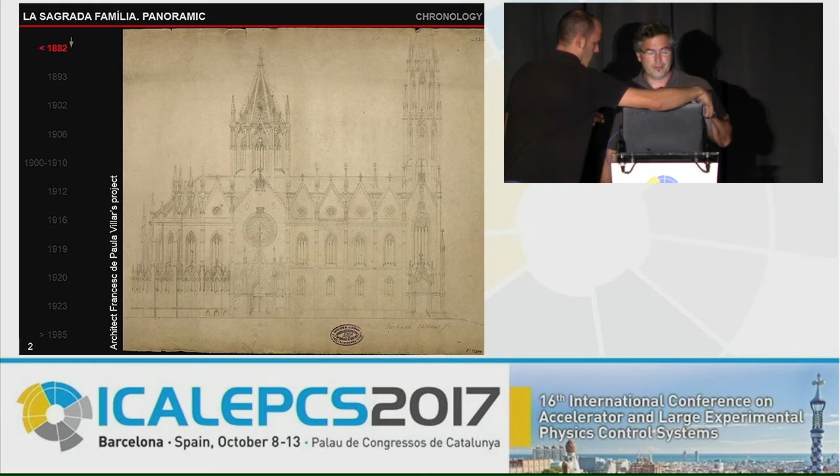Then in 1882, the first stone was put in place, and they began the project that you can see. That's a neo-Gothic cathedral. In 1883, because of some disagreements between the clients and Francesc de Paula Villar, the architect, Villar resigned from the works, and the association commissioned Gaudí to continue the works following Villar's project. He was 30 years old.

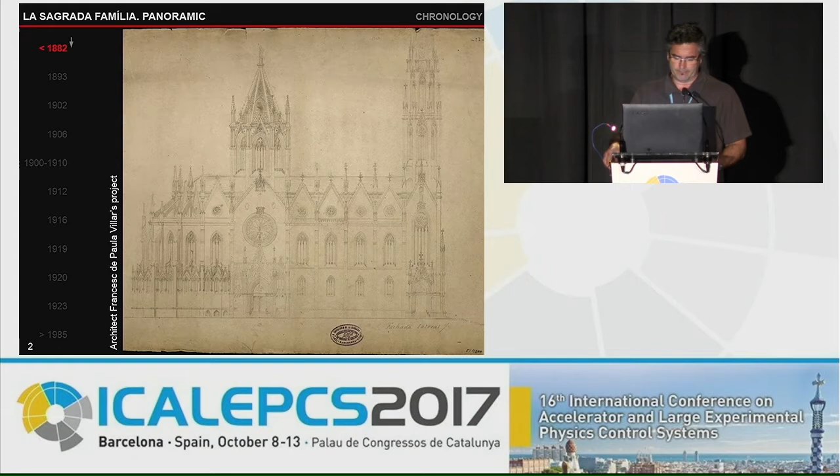But who was Antoni Gaudí? Antoni Gaudí was born in 1852 in Reus, near Barcelona, and in 1878 graduated from the high school of architecture. From this point, he participated in the Universal Exposition. He made lots of buildings near Barcelona and also outside Barcelona, and he collaborated habitually with Francesc de Paula Villar from 1877. Then, with these works over 20 years, Crypta Güell, Parc Güell. Güell was a Catalan industrialist, politician, and patron, and he had a special interest in modernist architecture.

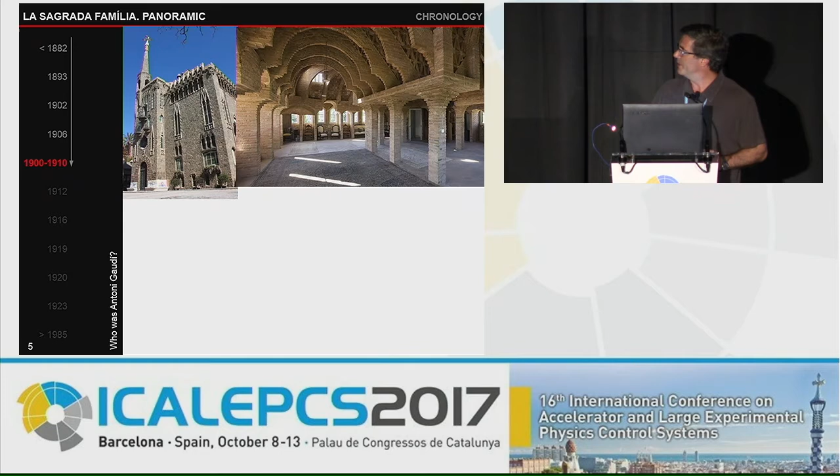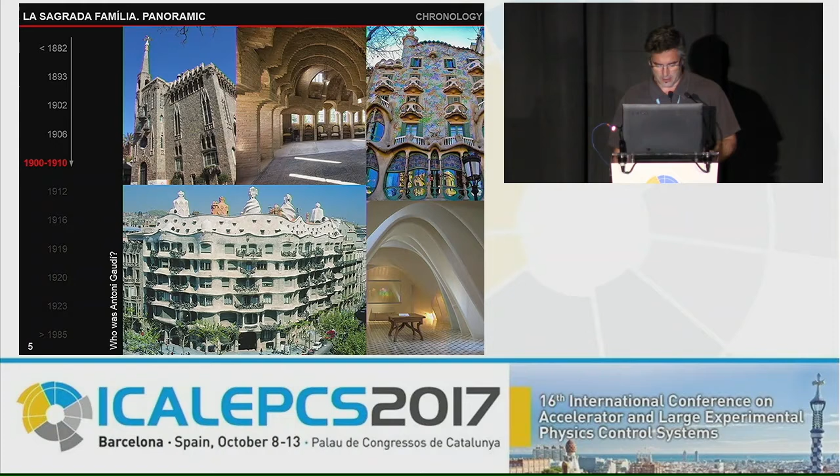Gaudí was a very rare architect, and he made a lot of buildings that were extraordinary and very special. These are the images we have in our heads when we talk about Gaudí's works. Normally, we see buildings with complex geometry, but also with some kind of, I can say, chaotic or aleatory forms. These are parabolic arcs, or this facade in Milà House. That's La Pedrera. La Pedrera is the Catalan name for the quarry. The image for the people was that it was a quarry. Gaudí, in his time, was not an architect without polemics.

He followed the works until 1902. In 1902, he dared to present a different proposal for the Sagrada Família, different from the project of Villar that he had been following for 20 years. And he presented that sketch. And the clients accepted. He was then 50 years old, and he already had enough prestige, national and international. Then the clients accepted the change from neo-Gothic to modernism.

Following a bit the life of Gaudí, then we return to Sagrada Família. In 1914, when he finished all the works he had in Parc Güell and Colònia Güell, he devoted himself entirely to the project of Sagrada Família. To the point that in 1925, he began residing inside the workshop of Sagrada Família. But not for a long time, because in June of 1926, 3 days after being hit by a tramway, he died in Barcelona.

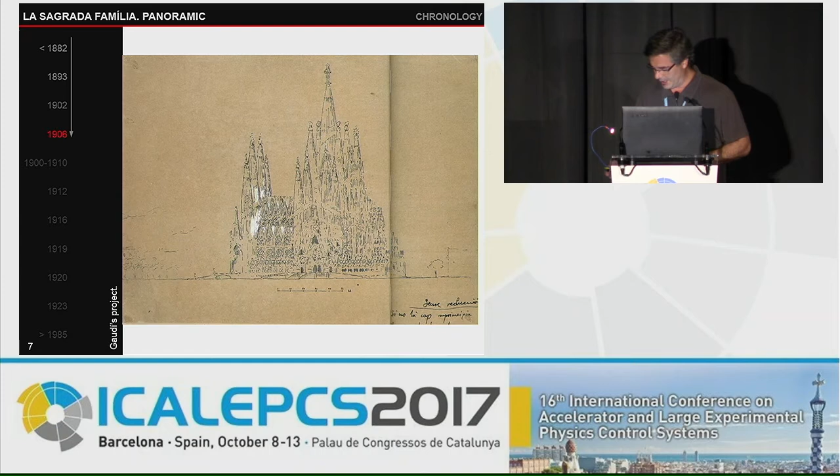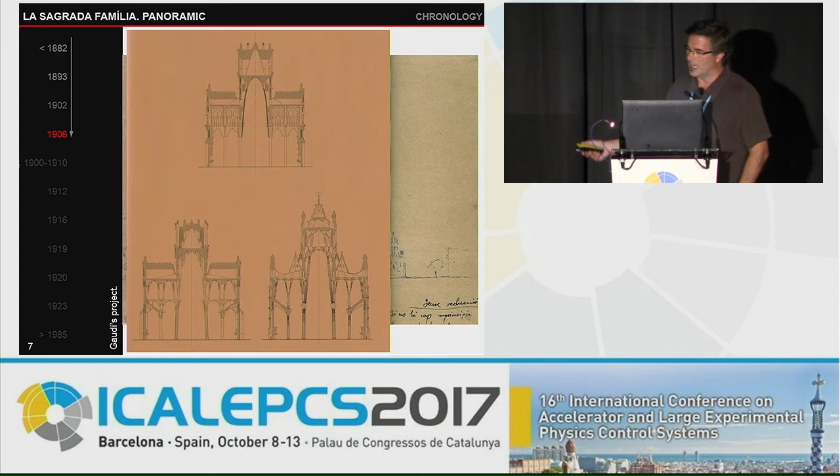This was the external view, but inside he decided to make a forest with the light entering between the leaves of the trees. He tried to make a forest. These are reproductions of the sketches of Gaudí from the first proposals, with a bit classical section of a 5 naves church, changing to more complex solutions for the pillars and not symmetric solutions for the arcs in the square and the roof, and the definitive section that solves the pillars of the main nave and the secondary nave like trees.

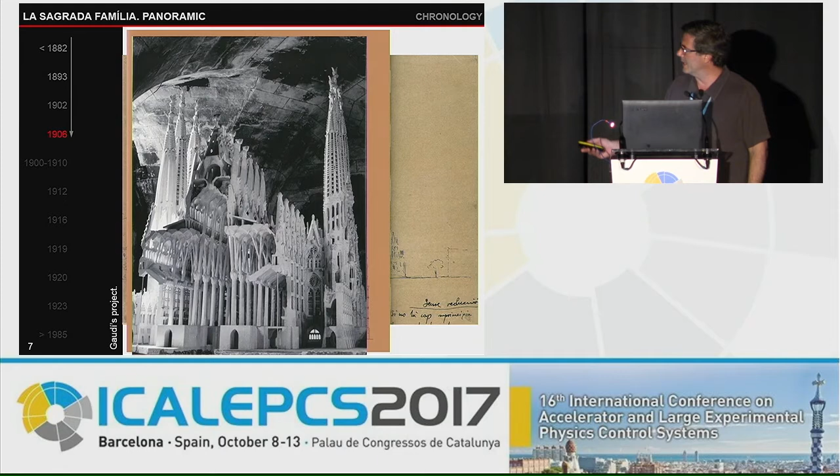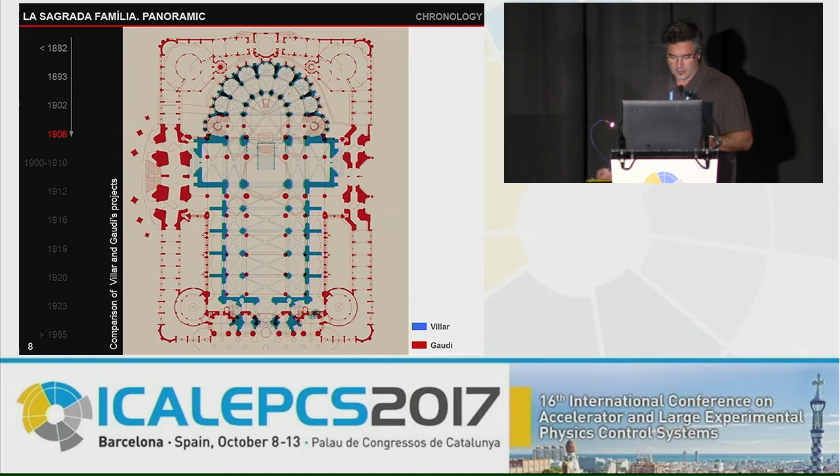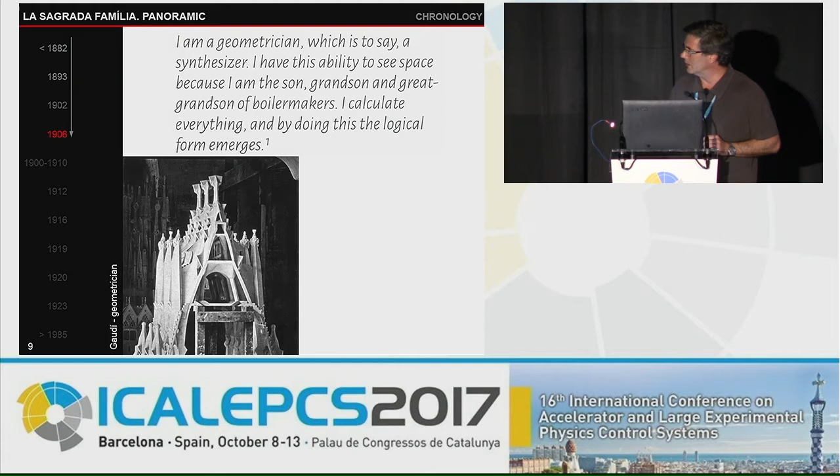This is a sentence from Gaudí. He defines himself as a geometrician. He considered that the form emerged from a structure and the structure emerged from the loads. That's, for us, very simple to understand, but when Neo-Gothic or Modernism were composing facades and buildings and then demanding the support of the loads, the vision of Gaudí was absolutely organic, absolutely geometric. He believed the loads must trace the form of the building. These are the upper roofs on the main nave and the sacristy with his forms.

And he was an intuitive scientist. He modified the forms with the weight. When he used these small weights to simulate the real weight of the building, he could change the directions and the form of the arcs and the plates, moving or increasing or reducing the weight he put in every one of these points. Then he searched to solve mechanically or statically the geometry he was looking for.

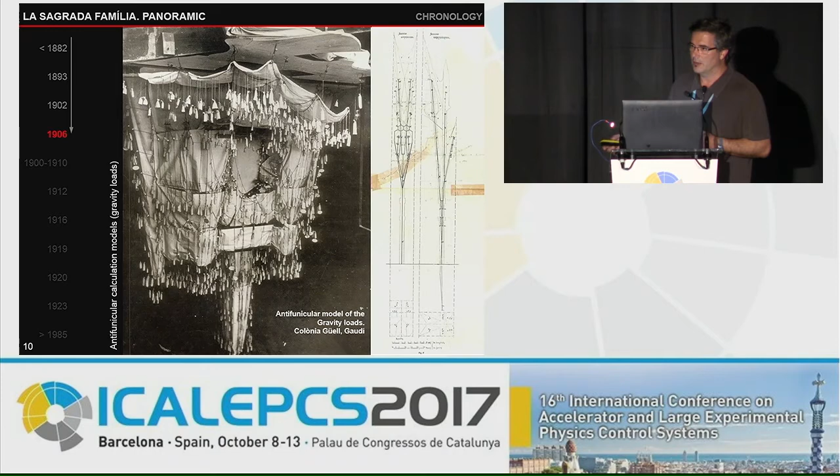This is his sentence: I calculate everything first by assuming certain weights to find the funicular. The funicular is the geometry and the direction he obtains from the cable structure. Sorry, these are cables that are covered with ropes, but the cables were the direction of the arcs, the geometry of the arcs. And he said, I can vary the funiculars, and in this manner the logical form emerged from the needs.

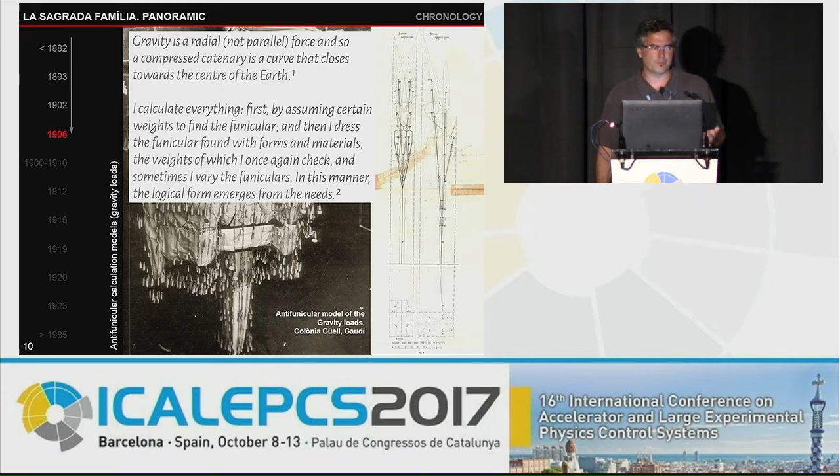Gaudí also was a planner. And he had very clear the vision that his building must be seen from the four corners, to always face two facades of the building. Then he made this project in 1916, approved by the city. At this moment, it was not a city, the Sant Martí dels Provençals, and this was the initial planning around the Sagrada Família.

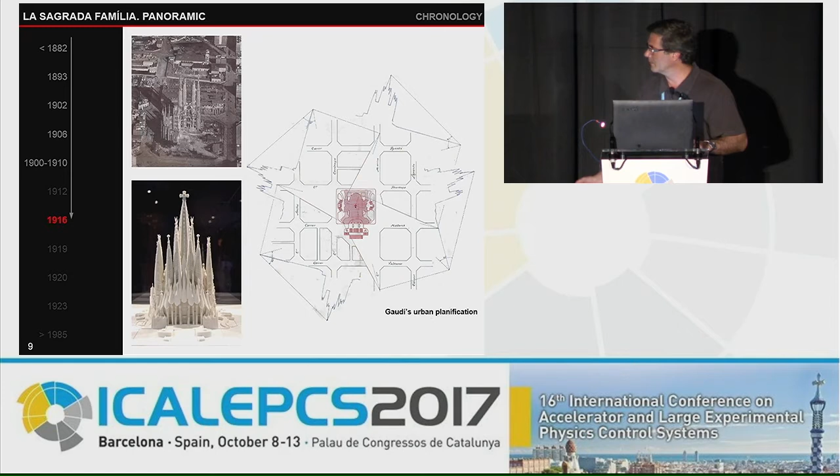This was more or less the state of the works in 1920. It was a bit before that that Gaudí changed absolutely his habitual form of work. And this is the point where I want to make a little parenthesis to explain that this building is not free of controversy. Many people say it's anachronistic to build a cathedral in the 21st century, or this is not the building that Gaudí could construct, because only Gaudí could construct the Sagrada Família.

But more than 4 million people every year visit Sagrada Família, and it's not because of our team. It's because of the genius of Antoni Gaudí. Because the actual team, we are more than 100 people involved in the project and the construction. We are following the project of Gaudí.

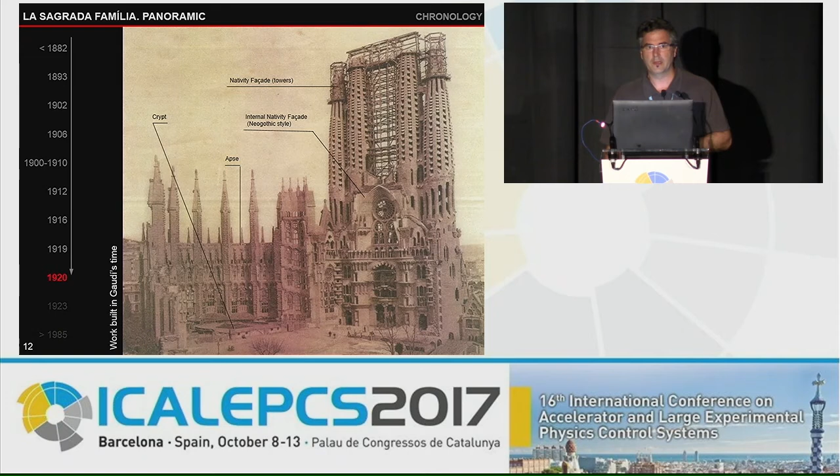And the question is, how is it possible to follow the project of Gaudí? Well, it's possible, and that's a liaison with the point where I stopped before, because Gaudí changed the normal way to project, and he began to work intensively to leave as many plaster models, writings and drawings as possible, but overall he searched the way to leave the laws to follow for the temple.

These are drawings. This is the workshop for plaster models. You can see pieces, serial pieces that repeat and can make the general and genial forms. This is another plaster model of the Glory facade. And this is the model, the actual one, made following all the laws we find in the writings, drawings, and plasters.

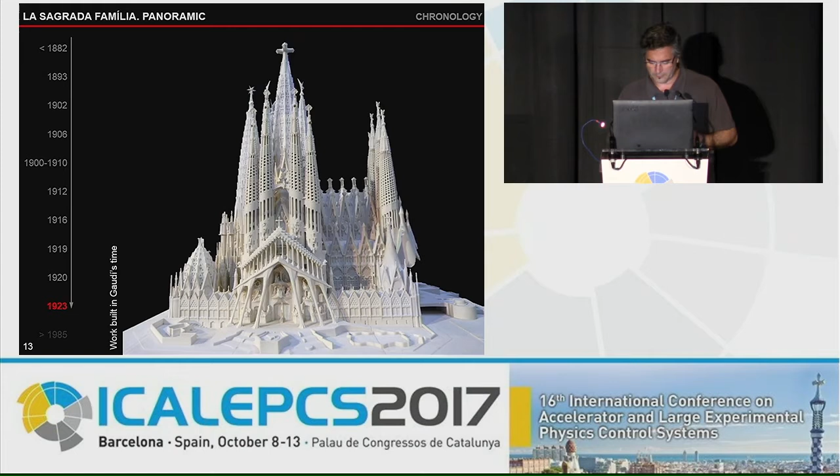As he said to his chronicler, César Martinell, great temples were not the work of just an architect. I know that the personal taste and techniques of the architects succeeding me will have an influence on the work, but I don't mind. I think it will be to the benefit of the temple. A work like this should be the offspring of a long era. The longer, the better.

From 1914, he only worked on Sagrada Família. And he based his design on these plaster models and on geometrical laws based on ruled surfaces geometry. From these models he extracted the drawings in 2 dimensions, mainly from photographs. The main geometric ruled surfaces he used were the hyperbolic paraboloids, revolution paraboloids, and revolution hyperboloids for all the surfaces, and he used catenary arcs to define the axis of pillars.

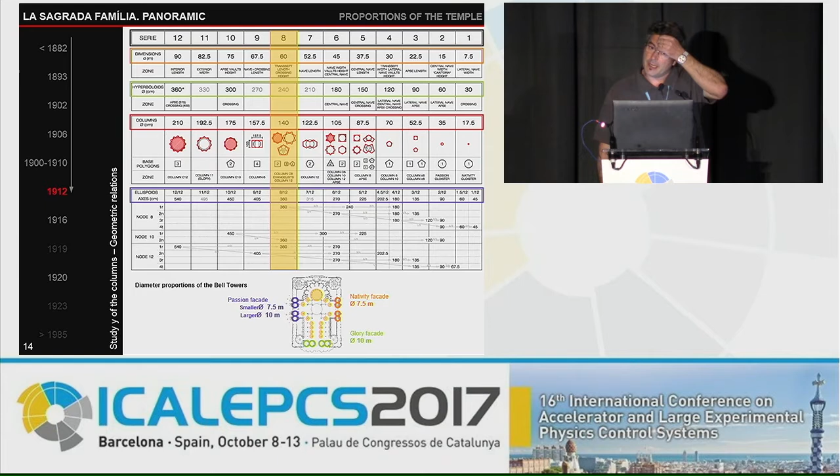Then he was a geometrician, intuitive, and a mathematician, because he conceived a relation between all the geometric elements. In this case, we have the table of the pillars, all the pillars of the Basílica. The beginning of all is this measure and this other measure. The module of the main nave is 7.5 by 7.5 meters, the distance between the pillars of the lateral nave. And he used multiples or parts not in base 10, but in base 12, like the apostles.

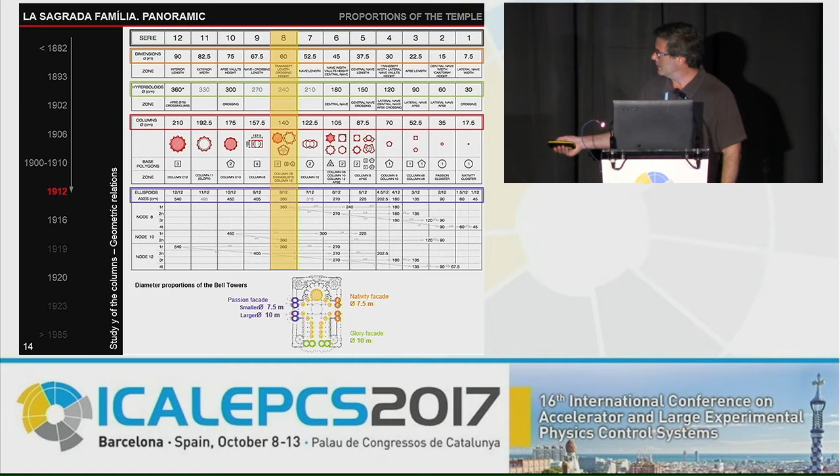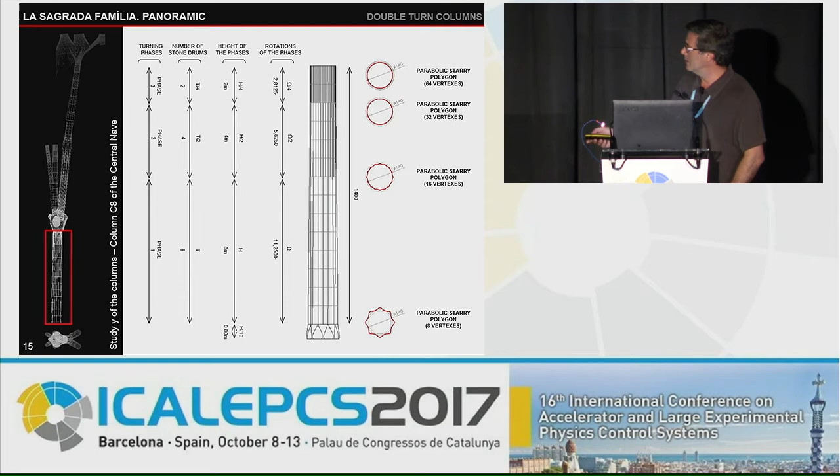Gaudí was very, very religious, and the Sagrada Família is an authentic lesson of religious symbology. Then applying this, for example, in the column of 8, the C8 column, these columns in the main nave, these others in the side naves and also in the apse. Looking here, this is one of these pillars. He began with the base with elephant feet and constructed the pillar in 3 phases. Each phase had 2 turning squares as a base. These squares were rounded with parabolas, and each drum of stone has the perimeter, all the skin, with a succession of little turns that are expressed in the parametric table.

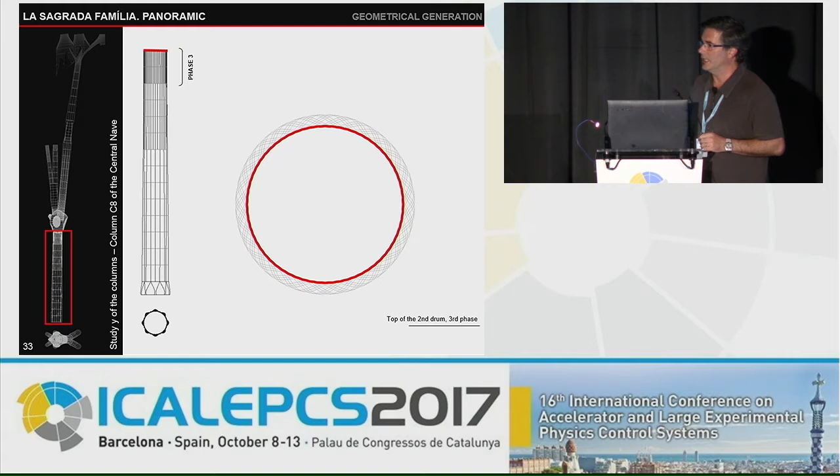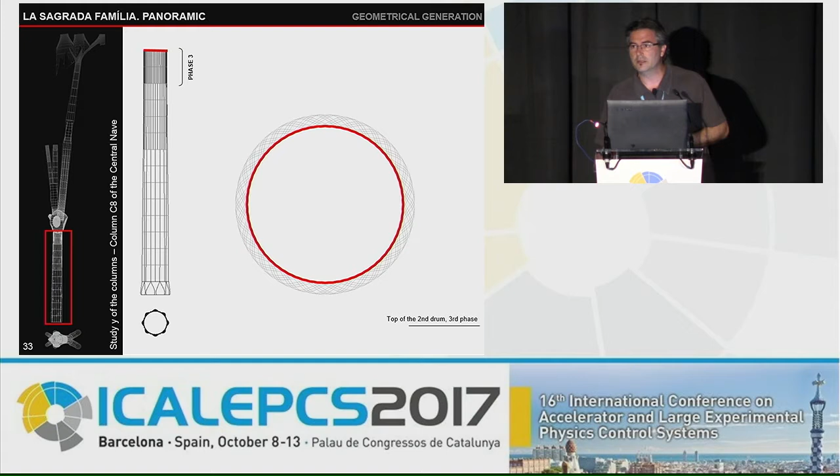With little turns, the intersection of the surfaces gives us the result, climbing drum by drum. This is the first phase, 8 meters high, the second phase, 4 meters high, with drums from 1 to 4, finished with 32 edges, and the last phase, with 2 drums and 64 edges. If you look at this form with magnification, you can see that it's not a perfect circle; the transition in each pillar is from 2 squares turned 45 degrees to the circle in the knot, where we have the end of the trunk and the beginning of the branches.

Like in nature, the trees are like this. In geometry, the trees are like this. The knot, at the point of arrival of the trunk and initiation of the branches, is 2 pentagons with 2 squares that develop the geometry through an ellipsoid. And these are the 3 knots of the pillars of the main nave with these ellipsoids in the envelope. These are the ellipsoids, and this is the intersection of one ellipsoid of revolution with the cylinders of the trunk and the branches.

You can see also a difference between these 3 pillars is the color. It's not only a question of color, it's a question of material. For Gaudí, when he worked with antifunicular calculation, he conceived that the same section would be able to support more load if the material had more mechanical capacities.

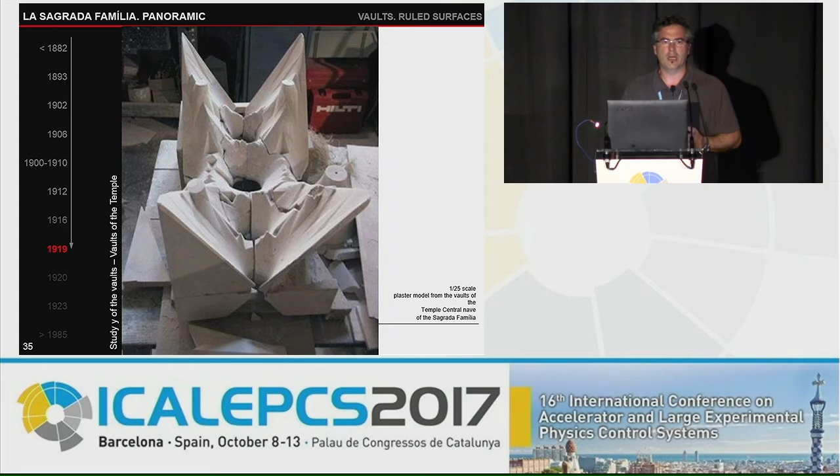And we find the 1:25 scale plaster model, and he worked in the vaults with hyperboloids, and the intersections between pillars and holes to let the light enter were parametric also, in relation to the multiples of the distance between the pillars that contain one hyperbolic model that had holes in these positions and in this other position.

After the vaults, we find the other difficult geometrical problem. This is the towers. We have 12 towers in Nativity, Passion, and, excuse me, maybe here I can, yes. This is Nativity facade, this is Passion facade, this is Glory facade.

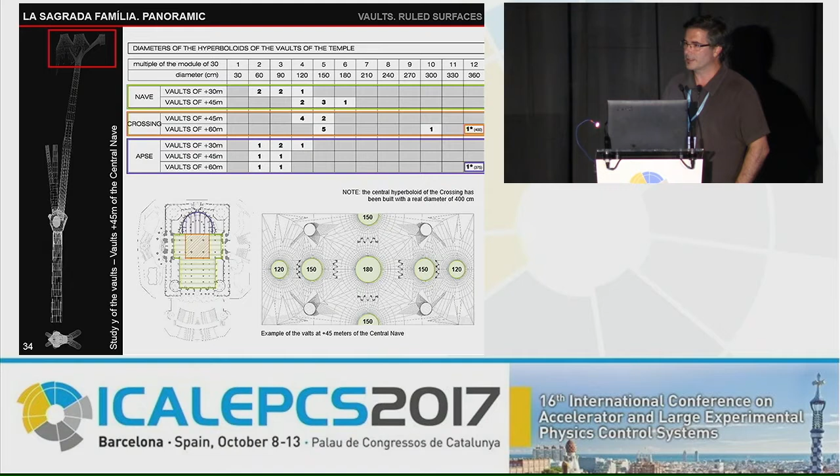Each of these three facades has 4 towers, but it is in the center, in the crossing of the Basilica, that we have the biggest tower, the Jesus Christ tower, and 4 towers around him that are the 4 evangelists. And after Jesus, just over the apse, we have the Mary tower, the Mother of God.

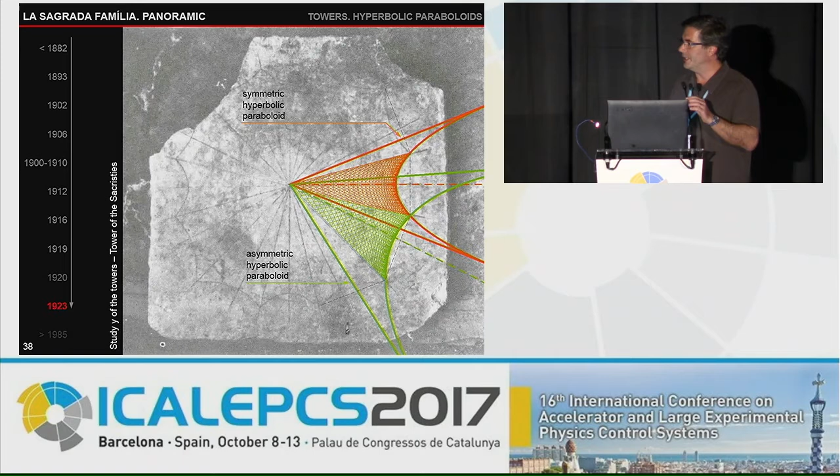Then how is it possible to trace and to obtain a law to construct these towers? His proposal was on a big stone with the form of the sacristy. And he described with the traces the hyperbolic paraboloids, asymmetric one of them and symmetric the other one. This is the result of converting these hyperbolic surfaces. The red ones are symmetric, the green ones are asymmetric.

Then we can obtain the surface and the nerves and the arcs of the sacristy. And the same for the towers. It is exactly the same geometry, but higher. Then this is the sacristy, the plaster model of the sacristy, and this is the conversion in computer.

And that was the big legacy of Gaudí, that when we arrived in 1986, 60 years after the death of Gaudí, we found all that. We could formulate all the proportions and dimensions we had to respect, and we began to work with these laws to prepare the models of the new building that were lost or were burned in the Civil War.

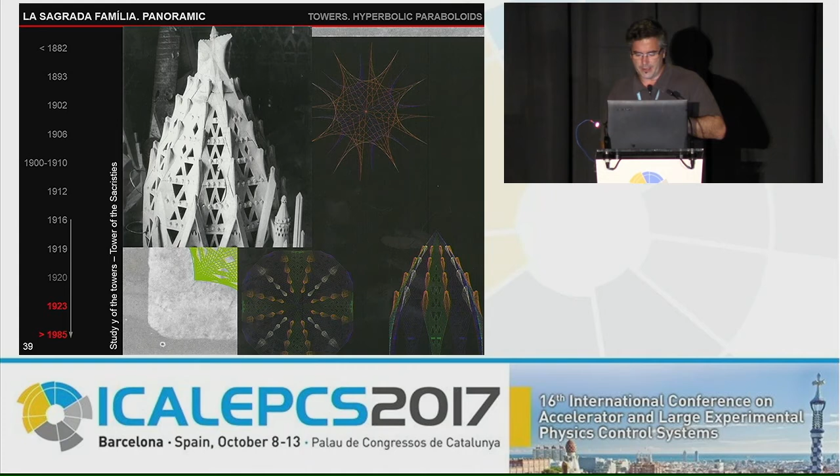Sorry. This new era was a new way of construction, because we began the new step in Sagrada Família. Till the 80s and 90s, we constructed with more or less conventional systems, but from the 90s, we began to project with another system. This is the pre-industrialized construction.

This means we are sure that the building now is more or less at 85, near 90 meters over the street, but it has to arrive at 170. The question is how to make all this big building over another big building and maintain the building under visits.

Many of you, I know, this afternoon will go there. Then you know that 80 meters over your head, there are hundreds and thousands of tons of structure that are at this moment being mounted and constructed. Then this was an obsession from the first day, but now it has a lot of sense, more sense, to work with the maximum security.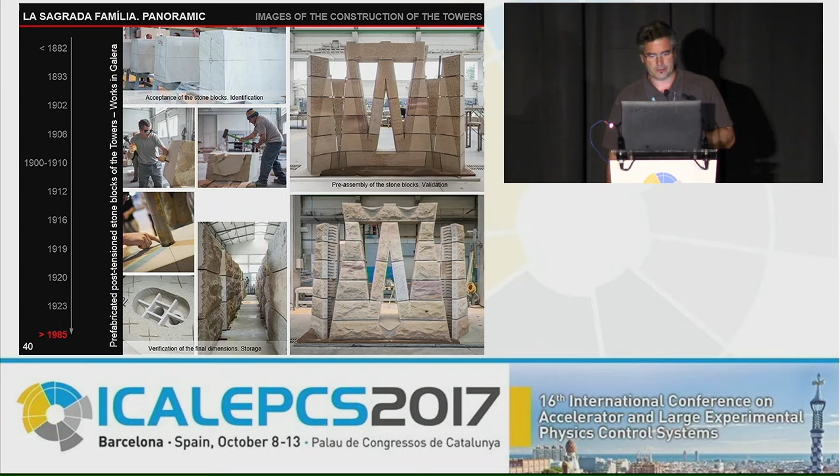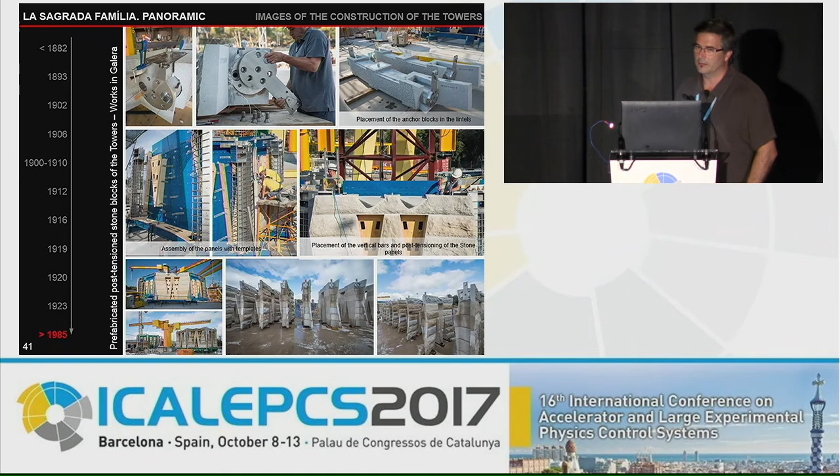The blocks are taken to the preparation workshop, which is near Barcelona, near Manresa, at Galera, and the blocks are sculpted, polished, machined there, pre-assembled, and stored, and mechanized, post-tensioned, and assembled in panels. Then here you can see the works of prestressing, here the mounting of the panels, and finally the panels we have to mount on site.

When that arrives at the work at Sagrada Família, we have to elevate it, place, and mount it with this kind of precision. This is one panel that may have a load of between 10 and 20 tons, hanging from 100 meters, with the precision to take it from the street and put it in place with not very much tolerance. We have tolerance, of course.

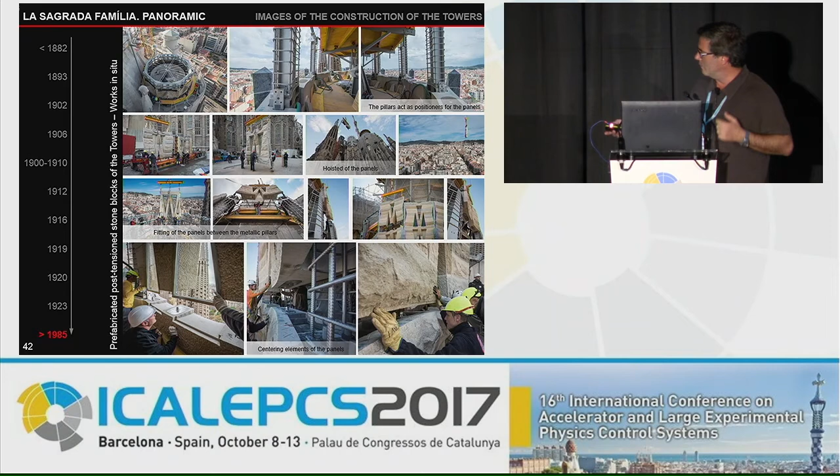Then, once we have the panels on site, we put the pieces to fix it. All the structure is in stainless steel. All the reinforcements are also in stainless steel, and the guides to enter the panels are the structure itself, the metallic structure we have inside. It is a rib that follows the geometry of the paraboloids, and these are the guides to enter the panels with the same geometry.

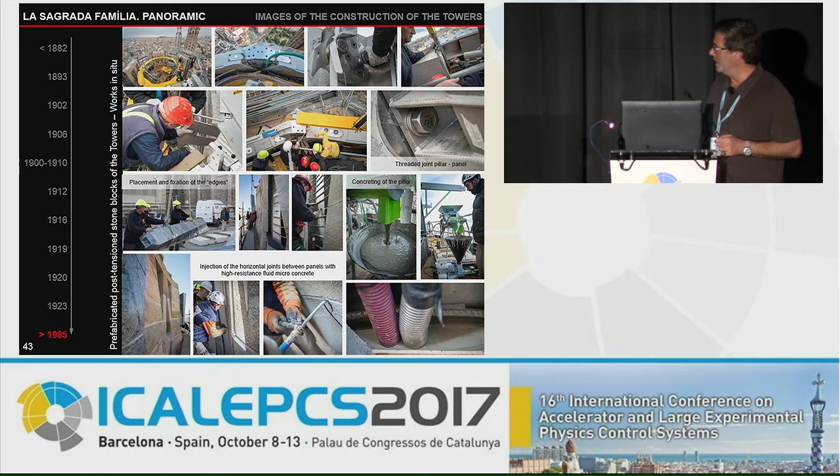When we have fixed it mechanically and with all the edges covered, we concrete the space that we have between the metallic structure, the steel structure, and the stone substructure. Finally, we make the sealant between the pieces, the different panels.

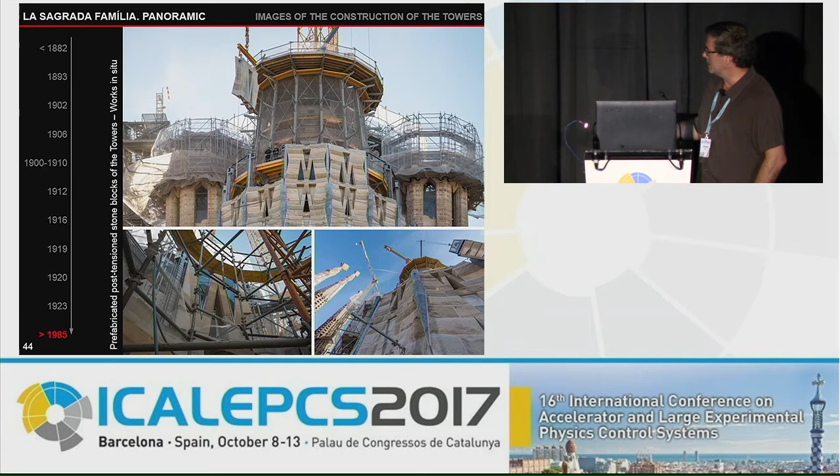Here is an upside view. And this is the rhythm that we can express for this part of the works. It is the most important, the most risky solution, because, as I said, we have not a lot of tolerance.

Then you don't have a line here, this is a curve. This is a hyperboloid that doesn't climb through here, but climbs to here. Then this is one direction where you have to put inside these little panels and make all the pieces work together.

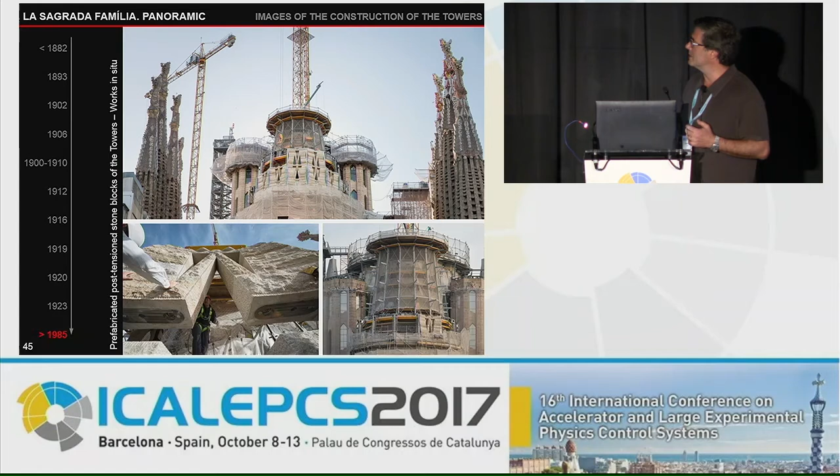This is one of the mechanical solutions we have to make the union between one step and the other. You can see here the steel structure with the lower panel. You can enter the other panel when you have the other level. All that is the result of projects during 8 or 10 years, with many people in the world involved.

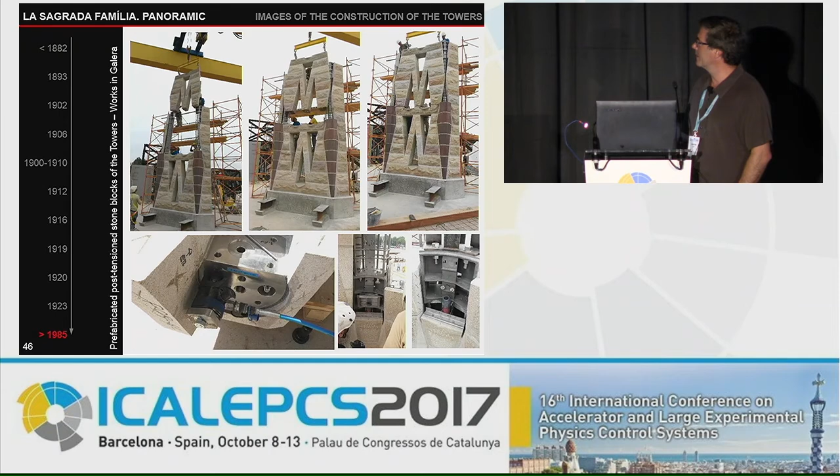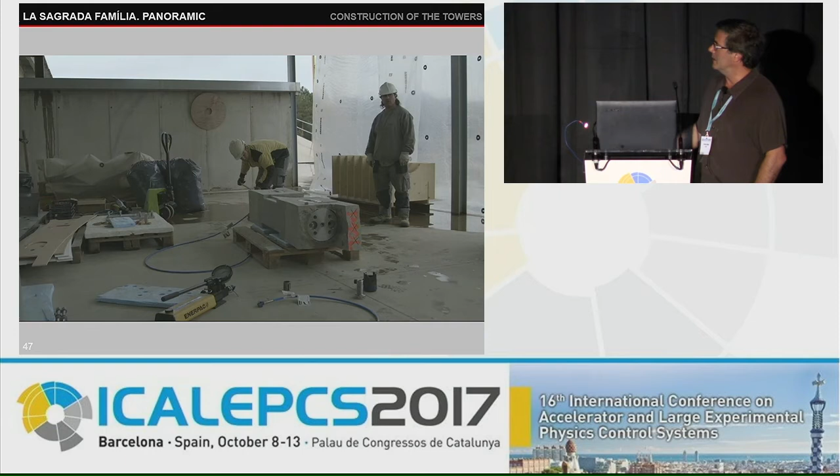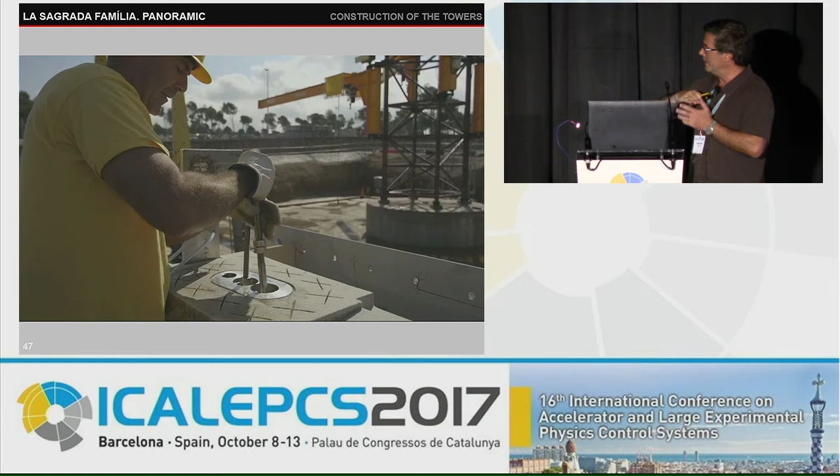This is a summary of what I explained. This is the work on the blocks. This is the presentation of the panels, the pretension, the prestressing of the beams, and the assembly between lintels and pillars, because they are all prestressed, and the assembly of these prestressed bars to form a prestressed panel.

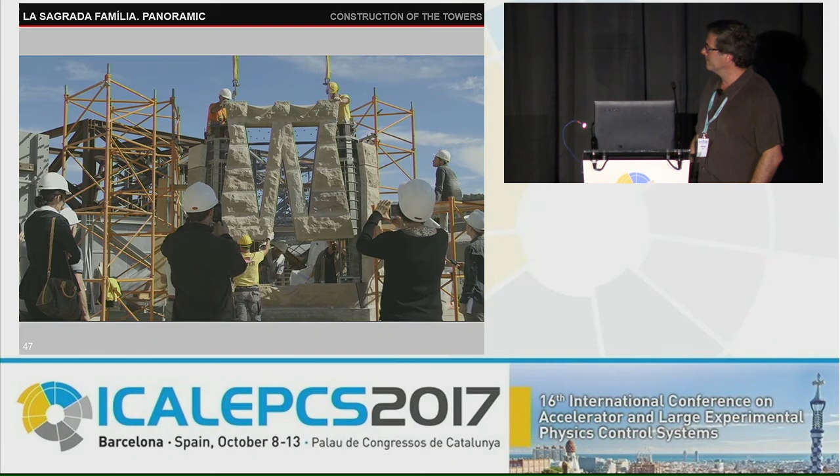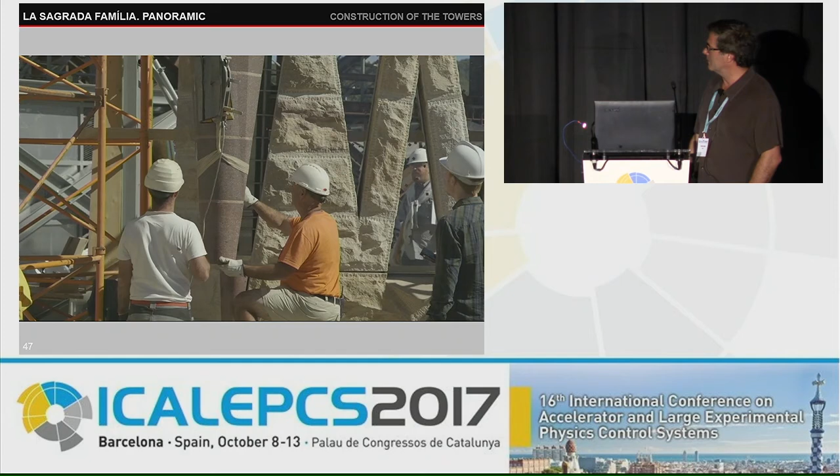These are the works, the precision works, and when you have that, you put, this is one of the stainless steel pillars that's fixed with the under pillar, and here you have the entrance of the panel that slowly enters through the point of connection. This is another stone that's placed in the corner to finish the envelope of the pillar.

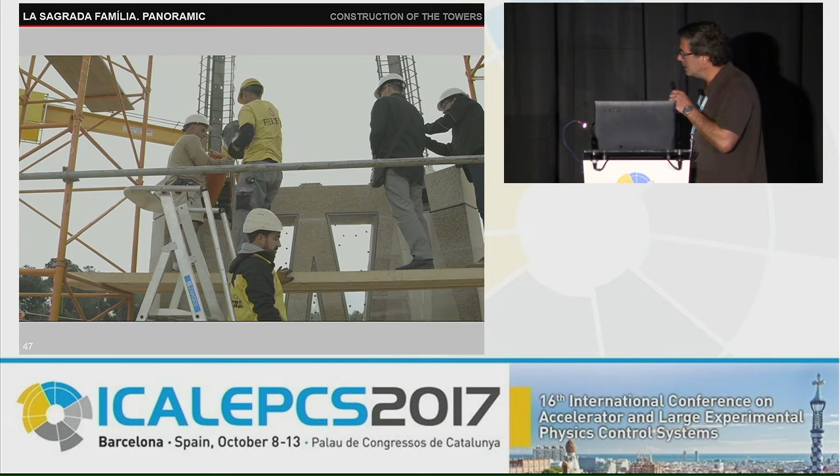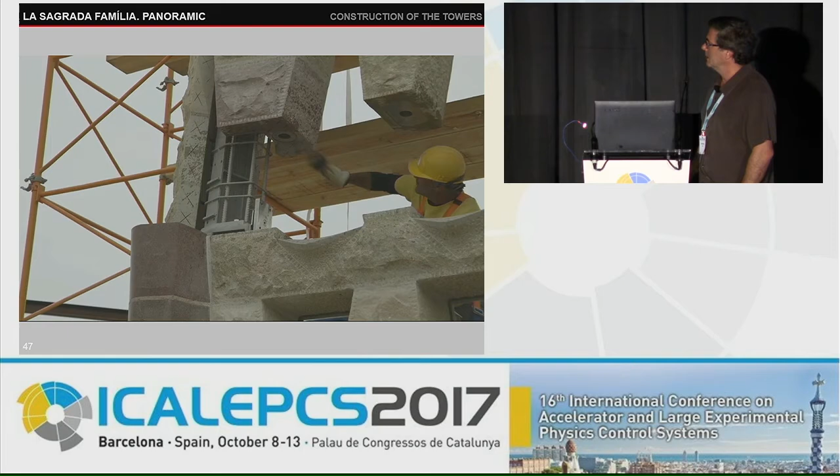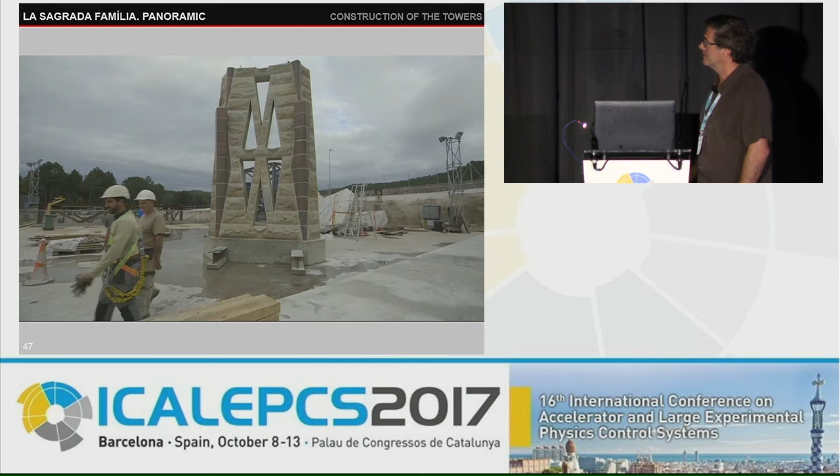This is the union between panels, and this is the preparation at Galera. No, it's not in Sagrada Família, but it's exactly the system that we are using now in Sagrada Família. And this is the arrival of the last panel that we have in this model. You can see this is the point that has to exactly join one model to the other, and that's one of the 200 models that we have to make only in the Evangelist Towers.

Let's change the question a bit. Weights and materials. We have here an example of the... see, Viollet-le-Duc made, I can see the date. Wait.

No. In the 19th century, I don't see the year. He made the pinnacle over the crossing in Notre Dame de Paris. The whole pinnacle had a weight of 750 tons.

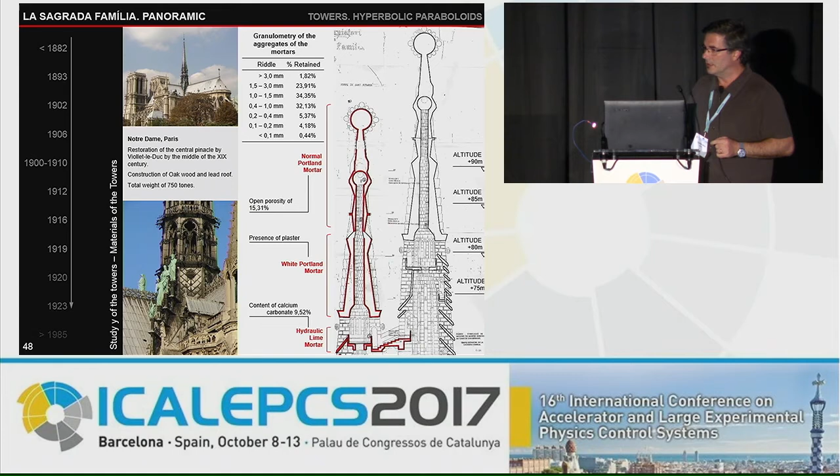And the towers of Sagrada Família and the loads on the building are a little bit bigger. The main pillars, these are the Jesus Christ pillars. Every column has to support 6,150 tons. This means that if we add the 4 towers, we have 24,000 tons. This is a high and heavy building.

The other columns are not so aggressive, but they also have a very important weight. And why do we have these loads? Why do we have these weights? Because it's a very high building. 170 meters is a very high building, and Gaudí didn't calculate, because he couldn't, the effects of the horizontal loads. Wind or seismic actions were not possible to consider with the antifunicular models.

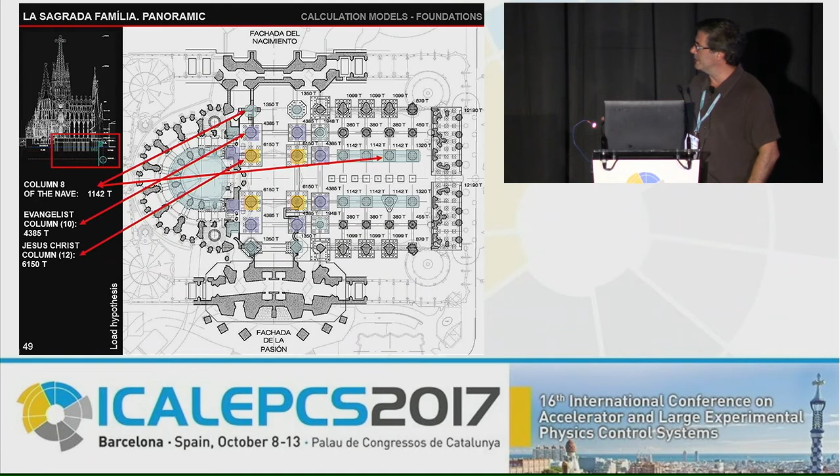In this case, excuse me, this is a small drawing, but you can see that the foundations of all these pillars are piles 20 meters deep that don't cross the phreatic level and can support the actions we considered in '86. Then this was a local reinforcement with micropiles and arms.

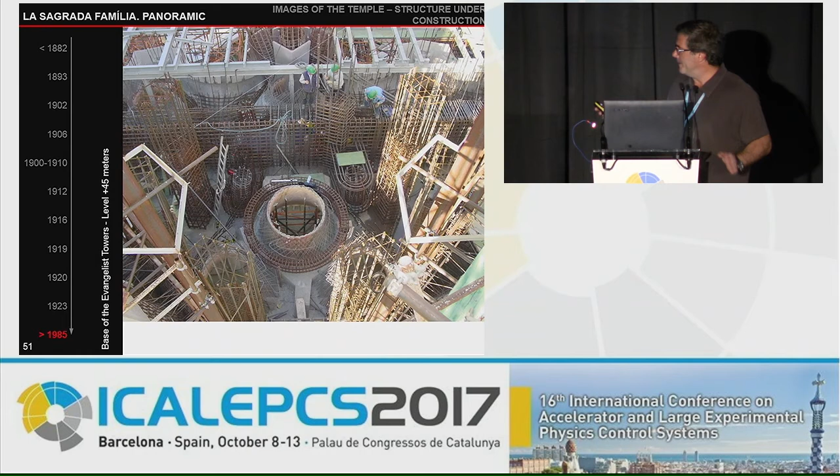And from here upward, we knew that the structure has to be between the skin, because the skin was the project of Gaudí. We had to respect absolutely the geometry of Gaudí's project, and we had a stone skin around the pillars, the vaults, the arcs that we had to conserve. As you've seen in the animations and last image, the structure really has very little space. This is all the iron we have to put between the stone skins.

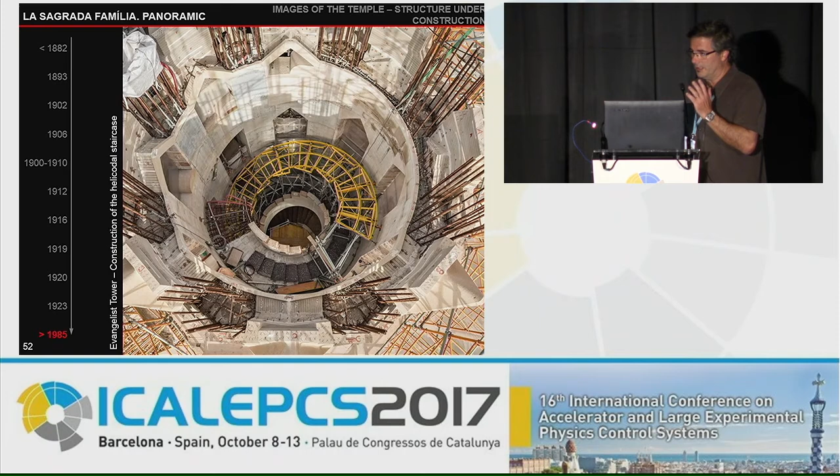You can see here a skin of stone, a wall, inside one of the staircases of one Evangelist tower. And these are the arrestants you can see outside. Then we can put concrete here. You have to think that the Evangelist towers will be 135 meters, and now we are between 80 and 90 meters from the street.

These are the works we have. This is from 3 years ago; it's covered now, but we can follow. This is to explain what kind of works we did during all these years. This is Mary's Tower. This is over the apse. This is the base of Jesus Tower. And these are the Evangelist towers that at this level are absolutely connected with the Jesus Tower, but at 100 meters they are absolutely separate.

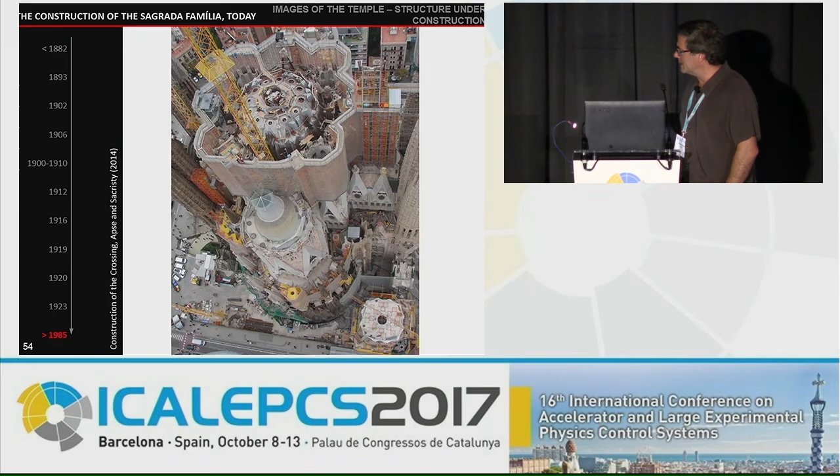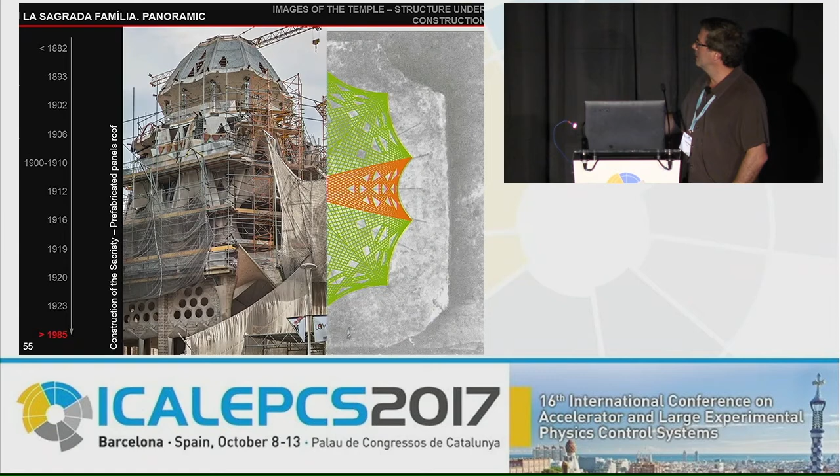And this is one of the 4 sacristies that the Sagrada Família will have. This one is finished, it's occupied, and a part is possible to visit. At this moment, you have only structure. When we worked in the sacristy or in the towers, we constructed the structure with provisional pillars, to add the facade after the construction of the structure and make the facade also have a structural role.

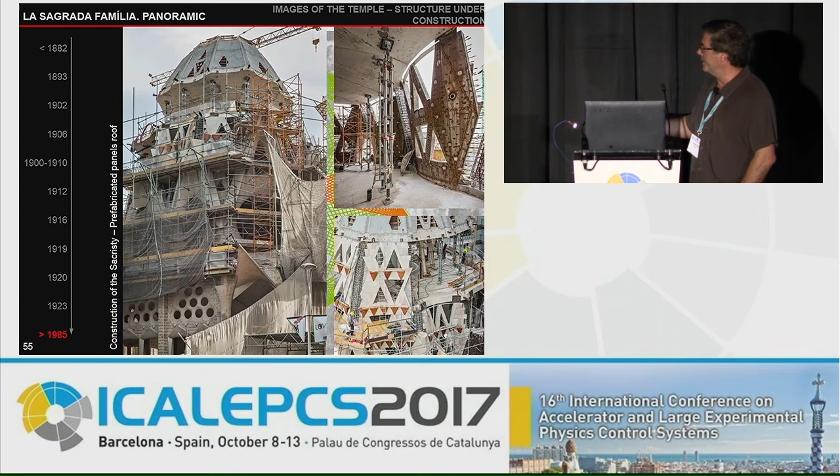This is one model. You can see it here. Here we have, like in the project, the arrestones. This will be another arrestone, and that comes from this geometry. And the sacristy will be finished as in the project.

Okay, this was a chronology of our works, but our studio is especially dedicated to structural solutions. When we began in '86, we had a problem: we did not have computer structural design programs strong enough to process such a big building.

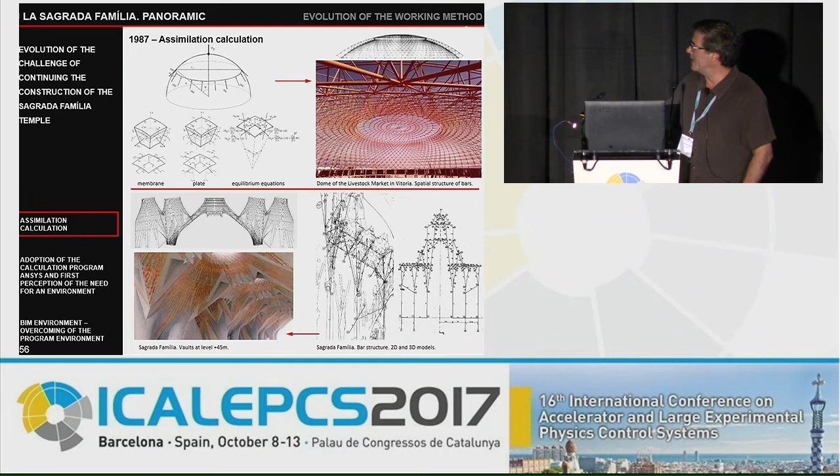In 1995, we adopt the finite elements method that had not the limitation to work only with bars. We could work with finite elements, and the finite elements had the possibility to work with plates or with volumes. And they could simulate the birth and the death of some of these elements. That was very important for us because the old building constructed in the Gaudí era was with stone. The stone is not able mechanically to support tractions. Then the simulation of the breaking of the stones was basic for us.

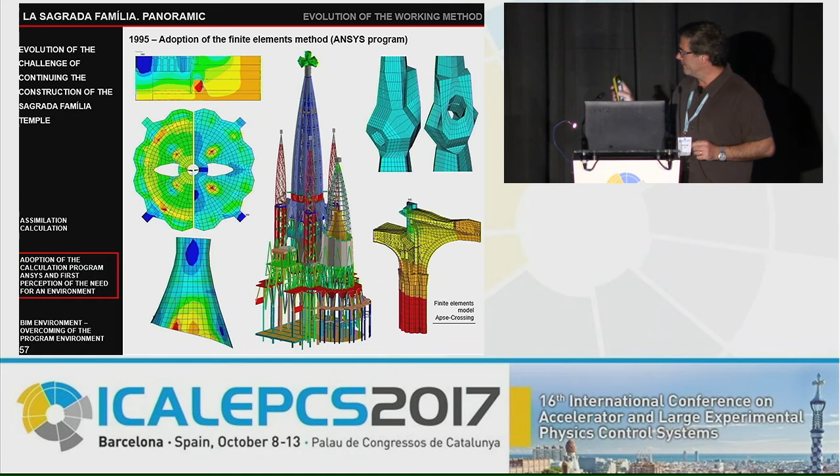This was the main problem we had, because the analysis with the elements could be an elastic analysis, that means the deformations are proportional to the actions, or plastic mechanical properties that could let residual deformations. Okay, then we worked with finite elements, and now we made another step.

The last step we made is something that was very, very basic for the future of the building. That was when we work more than 100 professionals in the same project. We need a platform of networking that could incorporate structural, geometrical, facilities, etc. We adopt the BIM, Building Information Modeling, in which the letter I is the most important because it's information. It's there where we place what category or what capacity we need of steel or the stones or the concrete.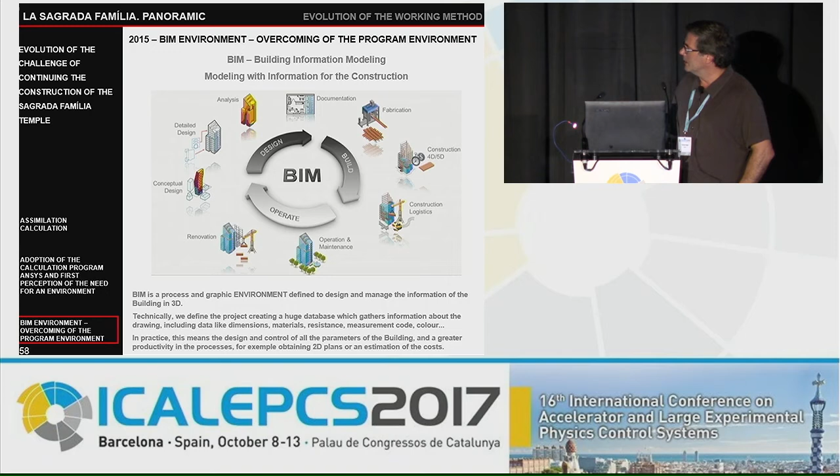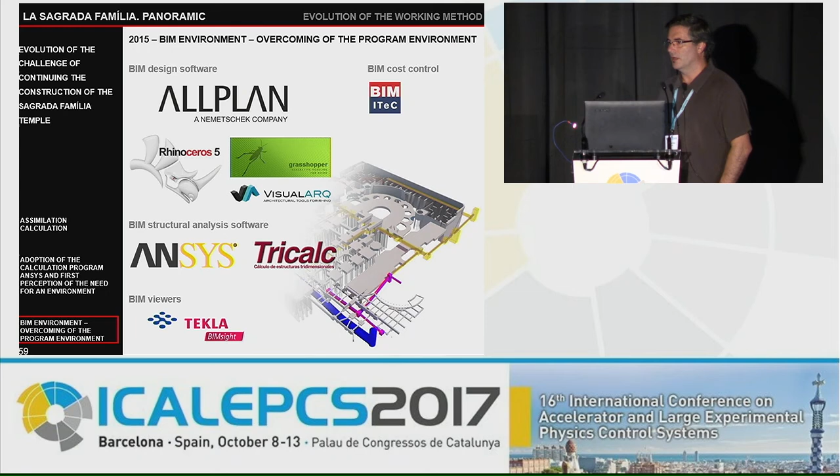This means that our environment in BIM that we work now in Sagrada Família is based on BIM design software. This is Allplan, Rhinoceros with the support of Grasshopper, BIM structural analysis with ANSYS and Tricalc, and BIM viewers in Tekla. We have also a BIM cost control to quantify each decision, which is the cost that it means.

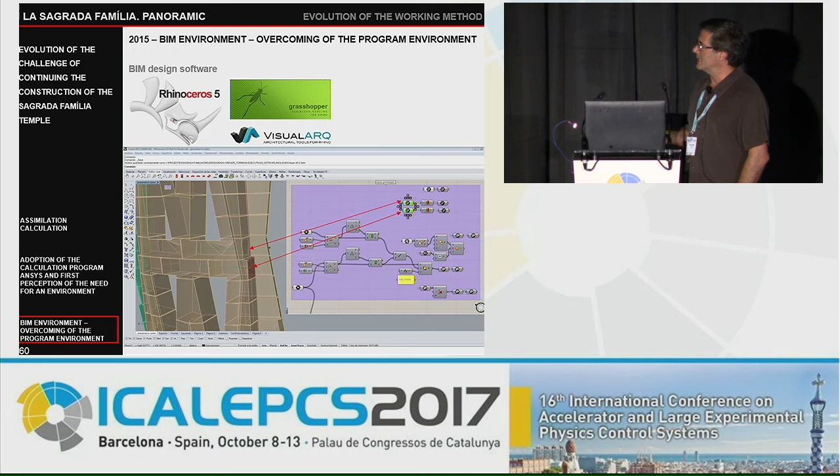In the first phase, when we receive the design from the technical office of Sagrada Família that defines the geometry and the materials, we need to obtain some information. This information could be a plate, could be an axis, could be a point, or could be a liaison. All that is only input information. We take it from the model and we process it with a platform of visual programming that converts this information as an input geometry.

This was this small square here. This other is the environment of Grasshopper for programming. Here we have this input information. This is the database with the main information we need in relation to materials available and minimum distance, the tolerance we need. And these are the outputs.

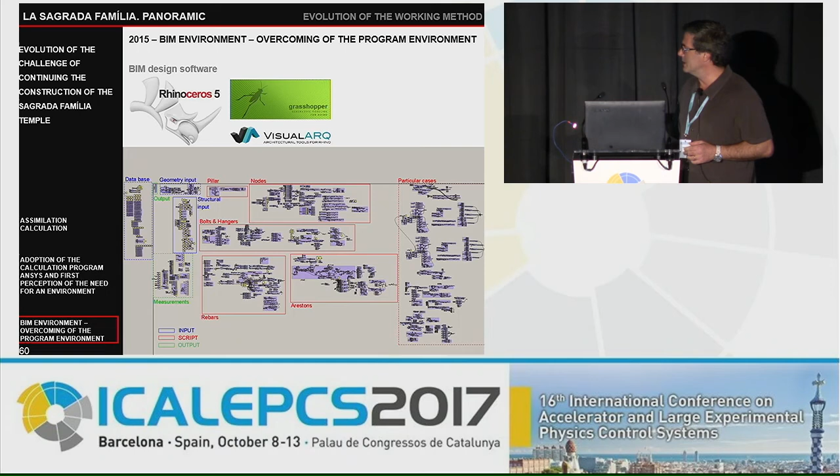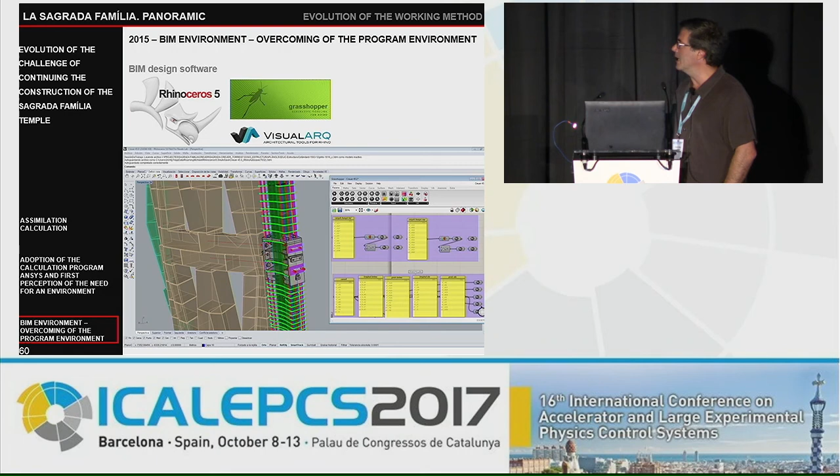These are measurements, and the output are the dimensions that permit automatically obtaining the geometry of the structure we can put with the geometry they gave us. This is the result, and this is what permits us to continue this new era of construction in Sagrada Família.

Finally, some images of the finished space. You have seen something that normally nobody sees, the workshop is outside of that. Today, you'll have the luck to go there. And I ask you to remember that Gaudí tried to make a temple where the sensation must be to be in the forest with the light crossing the leaves. This is the vision you'll have today.

If you see this lateral facade from the front, you can see the classical neo-Gothic facade. But you have to go see it from the side. This is exactly the same facade, not looked at frontally, but from the side. This light is in the facade. The facade projects the light to the core and the pillars. You can see the colors of the pillars with the difference of the materials. And you can see the light that comes from the vaults. This is the same objective of Gaudí. The light enters everywhere.

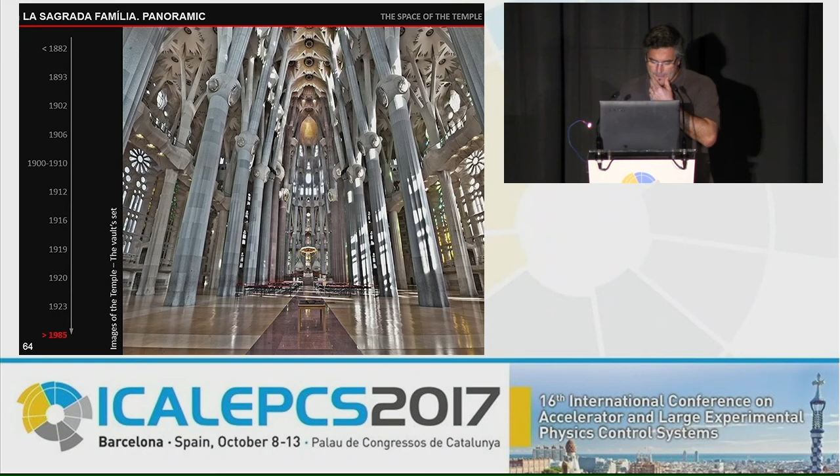And this is the view, the main nave looking to the apse. And we arrive to the crossing vault, to the crossing of the naves, excuse me. And if you look up, you'll see that.

Then I like to think that with what I have told you, you will know how to look more attentively at this great building. And I hope that this last image of the interior doesn't ruin the surprise that I'm sure you will have this afternoon on this site. Thank you.

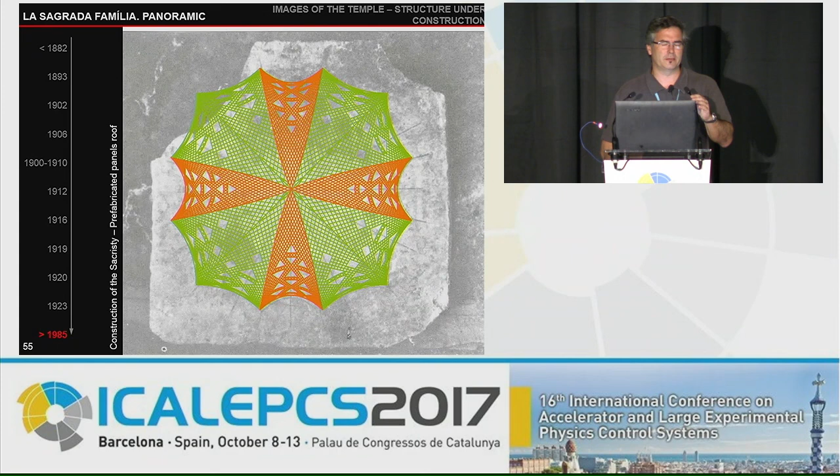What went on with the building between 1926 and the 1980s? Well, there were some old collaborators from Gaudí, and in 1960 began Jordi Bonet. Jordi Bonet was the chief architect that gave more impulse to the construction. From 26 with the civil war till 39, and the post-war with works almost closed, the evolution of works was very, very slow.

From the 60s with Jordi Bonet, who was the chief architect, the Sagrada Família changed a lot with more donations, and these donations permitted them to construct at a good rhythm, and they could finish the Passion facade, and they closed around the apse the Nativity and the Passion facade. But at this moment they saw that the continuity of the works needed a bigger team.

Then from the 60s to the 80s, the technical team increased and permitted to project the works that now we are following. So from 26 to 86, there are some old collaborators of Gaudí and new patrons, technical patrons.